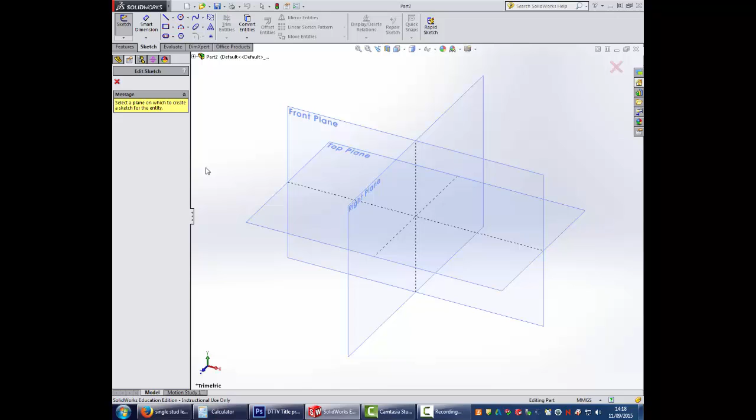So it's a very basic model. First of all, here I've chosen a part, and then I've come in and I'm looking at selecting a plane. I'm going to go to the navigation tool at the top, where I'm going to choose normal to and start off by drawing a box using the rectangle tool. I'm going to use the Smart Dimension tool. I click on the line and I drag across. In the modify box, I'm then changing it to the correct dimension, and again click, drag and change to the correct dimension.

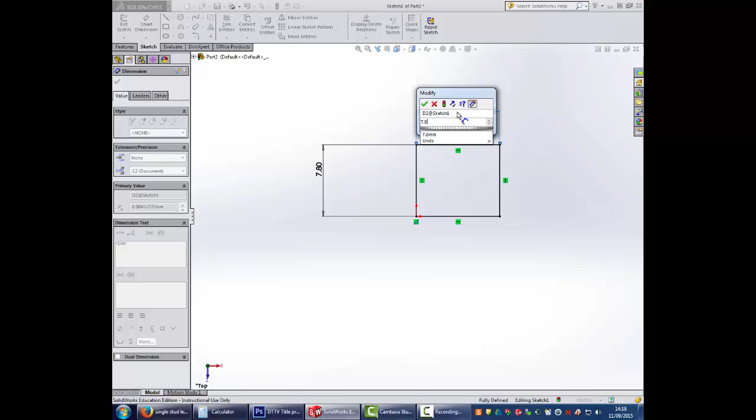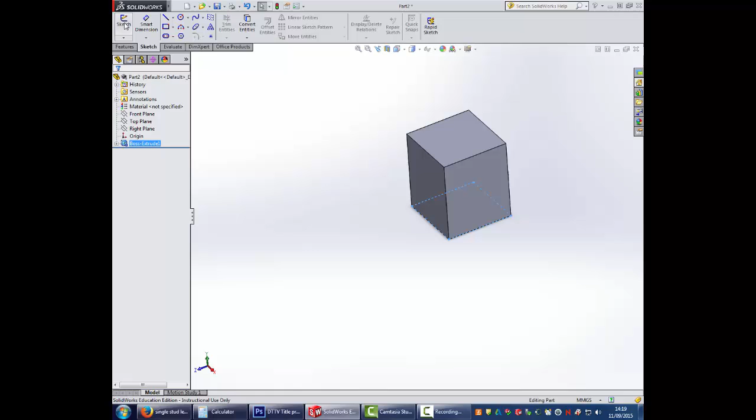I've swapped to the features tool, and now I'm going to give the block some height, so 9.6 here and a green tick. So now we have a basic block. From here I then need to consider the stud on the top. So what I'm going to do is select the top face, and then I'm going to go normal to.

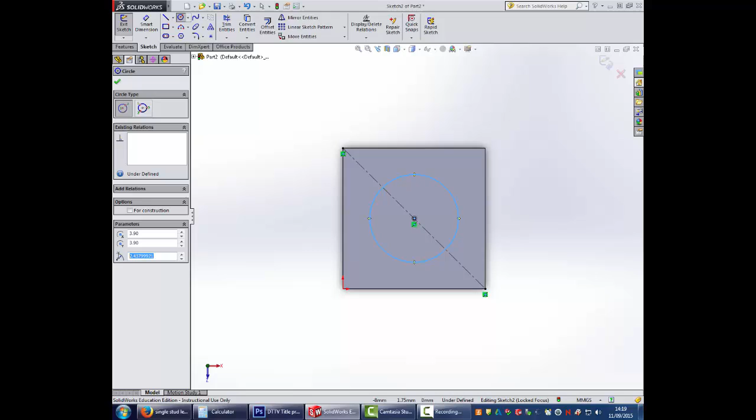The issue we have here is that if we use the circle tool, there's no way of finding the middle at this stage. So I'm going to use the flyout and then choose center line, and from the corner to the corner I'm going to draw a center line across there. If I double click, it stops drawing. Now I go back to the circle tool, and now I'm able to select the middle of the line on the orange point. I can now drag out, and now I'm looking at the radius size. It's 4.8 total, so 2.4.

Green tick that, and then go into my features menu, click on extrude, and you'll see that it gives me a preview in the yellow. Obviously that's far too tall, so I add in the correct height and green tick.

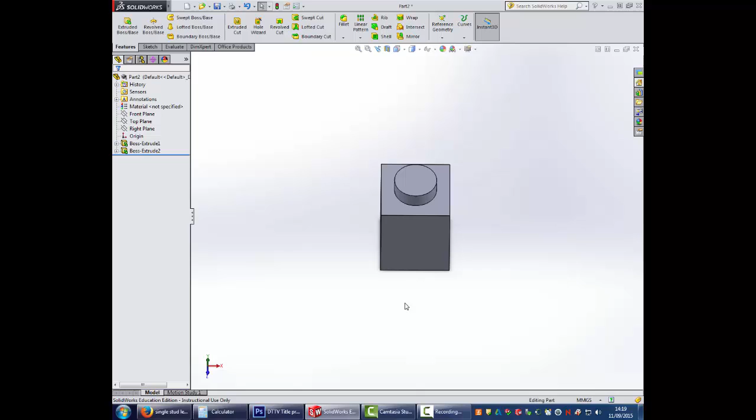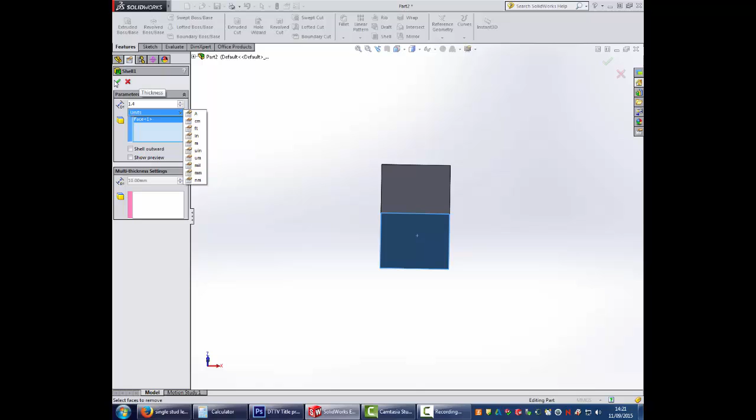At this stage I've got the essence of the block, but obviously it's not hollow on the bottom, so I'm going to use the shell tool. Again, from the 3D tools, click on the bottom face, and then I decide how big I want my shell to be. Into the box up here, I'm going to type my wall thickness. My wall thickness for this section is 1.4. Green tick it. And now you can see that the block is hollow on the inside.

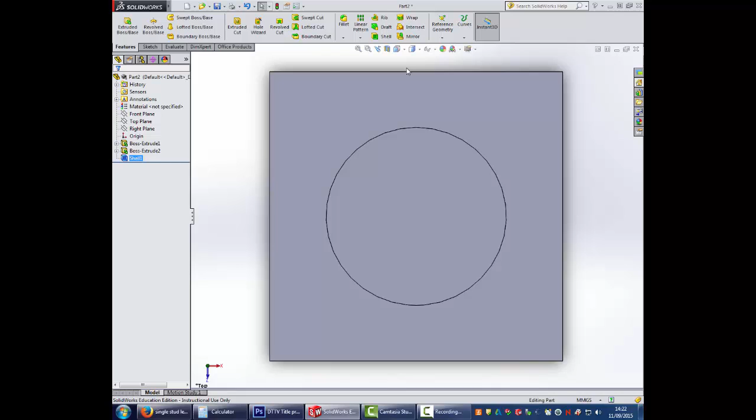At this stage I'm going to use navigation tools, and I can turn my block as I see fit. I don't want to see this face, I want to see the top, because I'm going to do the Lego logo. With SolidWorks we don't have exactly the right font, but it's a sketch. So we sketch on the top of the circle and we click the A button. I'm going to type in Lego here. The default font here gives me more or less the right sort of font.

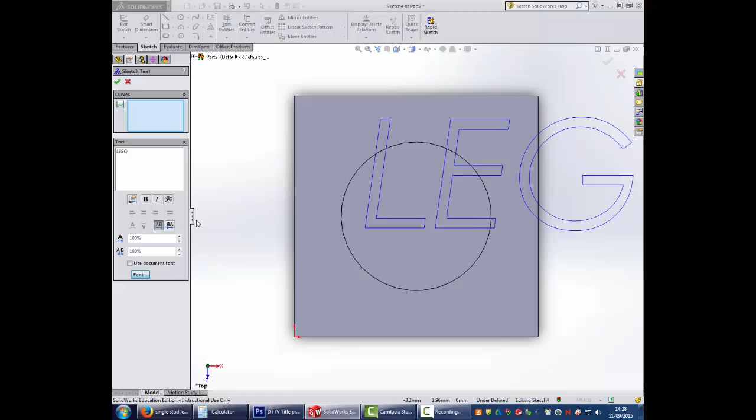Until I've clicked the use font, I'm not actually able to modify the size of it. So use document font, uncheck that, and then click the word font. From here I can change my point size, and for our needs we need 4. By clicking, I'm moving the corner of the Lego. It's not the most precise thing in the world, but it works eventually. So I've clicked the green tick.

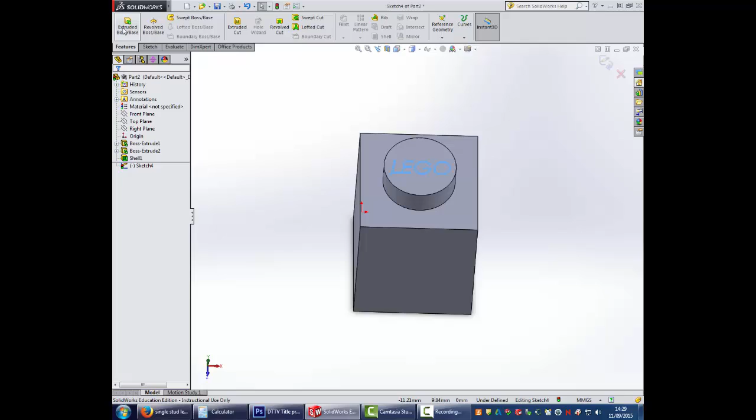Now I'm going to make that again into a 3D shape, so clicking on the features tab, pick an extruded boss base, and giving it some height. Now here I've got 1.7, which was the last figure, so I'm going to try 0.4, and I'm going to green tick that.

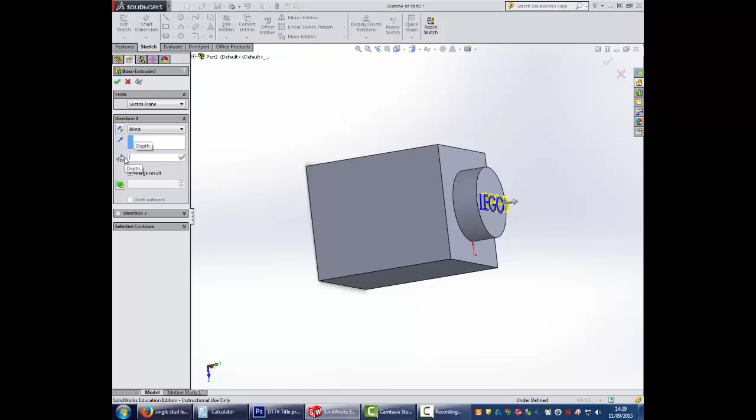Now when we look at that, that's very high indeed, so I'm going to right click on there, click edit feature, and then I'm going to change the height again. So you can go back in and change the things that you've done if you need to amend the sizes. So I've gone for 0.1 millimeters. Green tick that, that looks better, I'm happier with that.

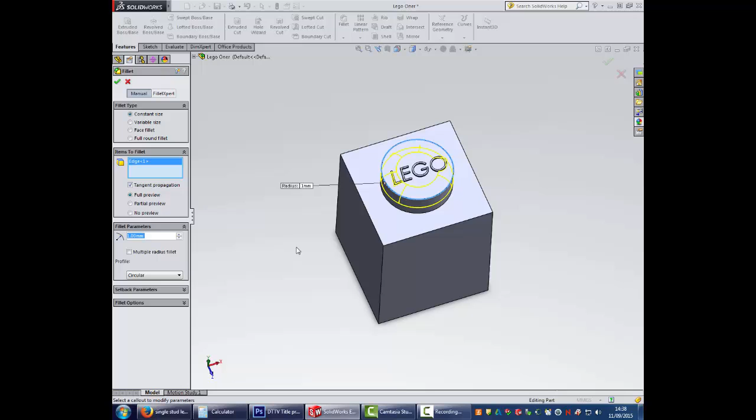So I'm going to go to the fillet tool. Constant size is the one I want. In here I've got 1 millimeter at the moment, so if I click on here you can see it previews it, and 1 millimeter is quite a large fillet to have. So I'm going to change it here, I'll go for 0.2. As you can see, the preview looks better. So I've green ticked that, and I've now got my Lego block. You'll notice on the single stud block that the edges are actually very sharp, and they're not filleted at all.

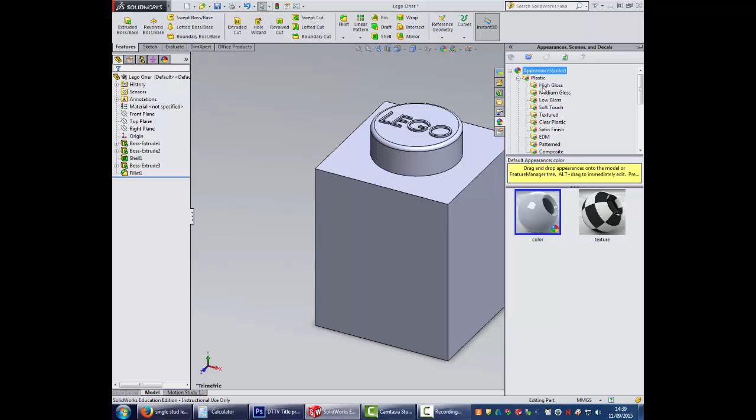Right, we're now going to add some appearances, so I'm going to use the appearance tab. In here, go to appearances. Now it's a high gloss plastic, so that's one of my options. And I'm going to choose a suitable colour, drag and drop it on. Now I've got different options here, and you'll notice as I scroll across this box the different options. I've still got my finger pressed. I'm choosing the whole thing, but you could just do a face or the individual fillet or boss.

Basic scenes, going to find one that I like. In the studio scenes, drag and drop it on. There's no difference here, but if you come to render it you'll see that there's a significant difference later on. I'm now going to save the file, and you should do as well. So go into save as or save. I've called this Lego one-er for the moment. You could call it single stud, providing you can find it, and go from there.